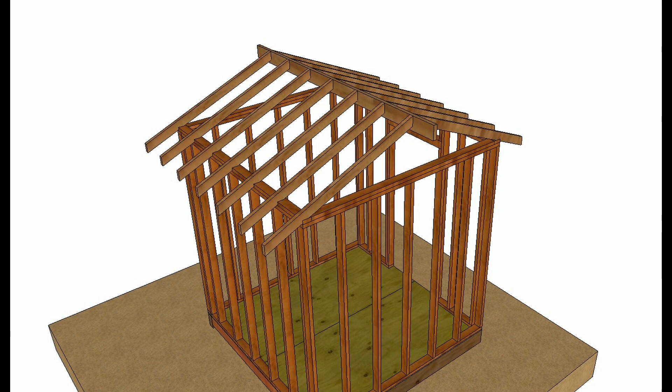In this video, I'm going to try and provide you with a basic and simplified explanation of cathedral or vaulted ceilings and why you can't simply remove ceiling joists or rafter ties and put drywall on the bottom of the rafters if you don't have the right

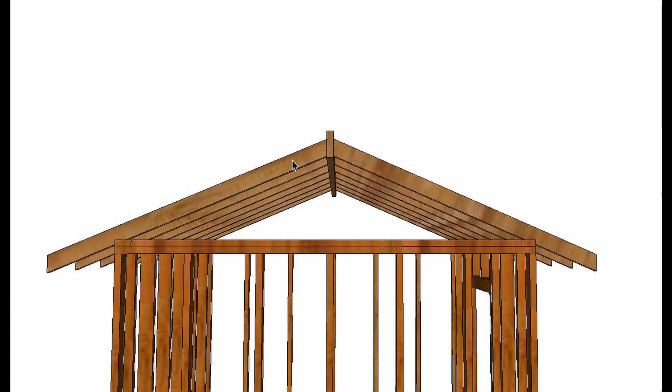type of framing. Now, in a regular, conventional roof system like this, the weight in a downward motion is going to be applied to the rafters and the ridge and can actually force the walls out. It can bow these walls out and create a dip in the center of the ridge. And the reason for that is because there isn't anything tying it together.

With the ceiling joists and the rafter ties, you're creating a connection from one side of the wall to the other side of the wall. So as the weight is placed, just the basic weight of the roof by itself, I'm not talking about adding snow or debris onto the top of the roof, the weight that would be transferred in this part right here is going to want to force the wall out. It's going to want to push it out and let this sag down.

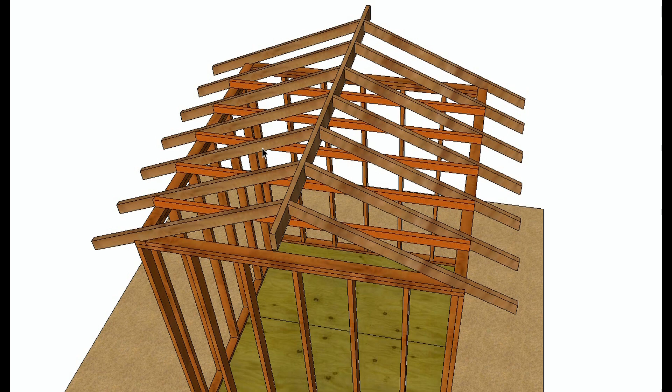Now, with this setup right here, I'm not about to suggest that you're not going to get a sag in the roof. If you have rafter ties or ceiling joists and the center of your ridge or parts of your roof are sagging, that would probably have more to do with the engineering of the materials. Maybe they're not the right size. Let's say you have a 2x6 rafter that's sagging. It might have needed to be a 2x8. So this right here is the typical way to frame a roof, a conventionally framed roof with a flat ceiling.

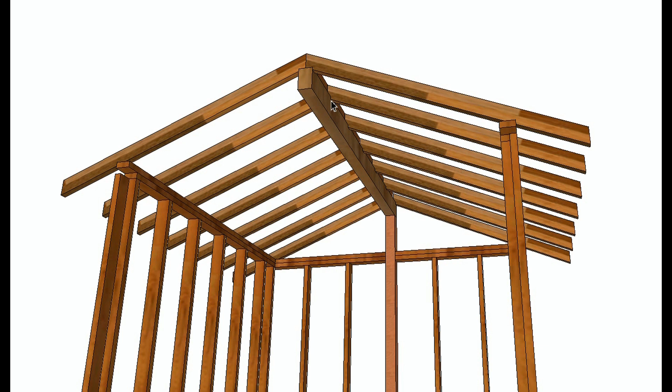Now let's take a look at another common way that you would frame a cathedral or vaulted ceiling without ceiling joists or rafter ties. This way right here is going to require a ridge beam. And I'm going to show you two methods. This method right here, and the next method will be where I raise the ridge up. In this particular method, the rafters are going to lap and connect to each other. In the other one, they will connect to the ridge.

So in this one right here, let's take a look at how the load would be distributed. The load from the roof is going to sit on the beam, and then it is going to come down the supporting post on the side here. Now, with this system, any load on the roof is going to be transferred between the wall and the supporting beam on both sides. So you're not going to have the walls spreading out on something like this.

And I'm not suggesting you can't have the walls spread out. I've actually seen it on longer walls. But the rafters themselves will actually help to prevent the walls from spreading out, because this is where the tie is. The rafters will form a nice bracing system and keep the walls from spreading out, because the load that is transferred onto the rafters isn't going to be moving the rafters down,

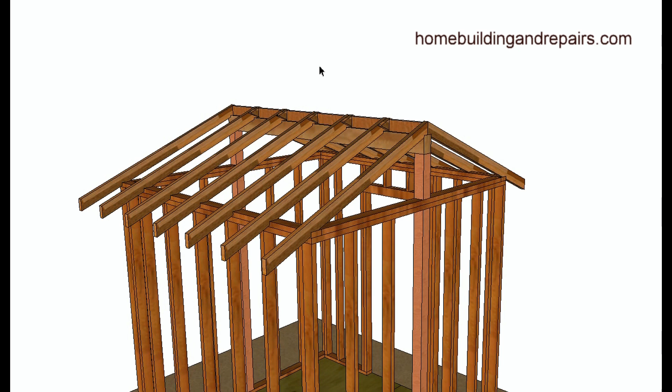creating a sagging ridge, which of course would force the walls out. That's actually supporting the walls. So the ridge beam is actually supporting it. With no movement down here, you're not going to get the walls to spread out. And I hope that makes sense.

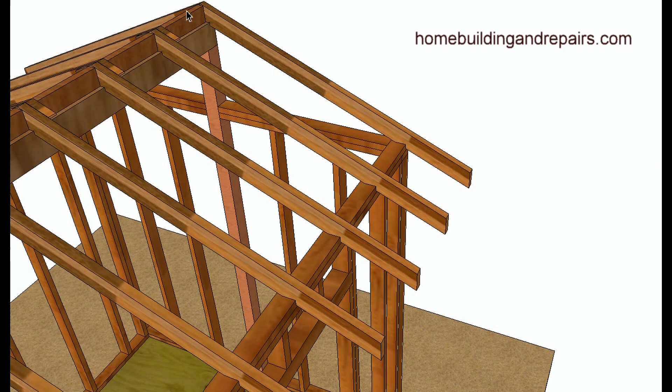Let's take a look at how we would connect the rafters here. This is actually lapping the rafters. You would nail into the rafters, maybe put 3 nails on each side, something like that, and then you would install some ridge blocks. And of course you would have seat cuts at the bottom for the rafters. Let's take a look at finishing the ridge off. Sorry about that. You'd basically just have two rafters that would line up at the end of the ridge.

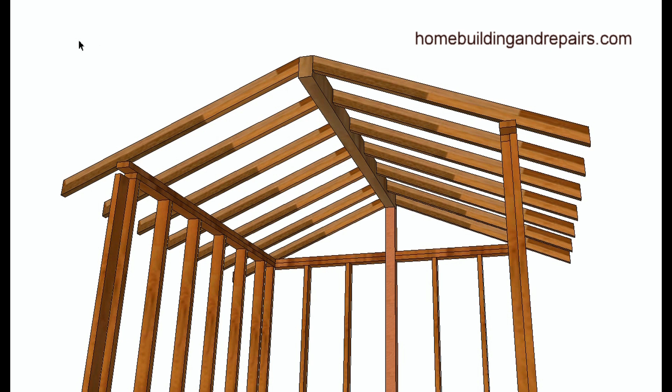Here's the other method I was referring to. We would have the rafters attaching to the ridge, and then of course the posts and the beams. Now I wanted to point out here I have a post that's sitting on top of a wall. We have a supporting post under the wall. Over here the post goes all the way up. I would imagine both methods would be fine, but because this method right here creates a structural break, that would need a strap.

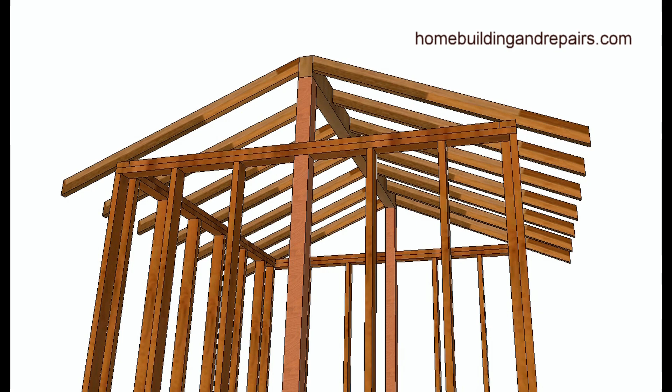You would need to put a strap on the wall on the other side. And this one right here, you're just transferring the weight down, but you could actually create a hinge point here. A lot of engineers don't like to see it. They'd rather see the strap on the wall with a full-length post than something like this, but I'll leave that up to you. Remember, this is the basics. I don't want to get carried away here, even though I just did.

What the heck? So, roof rafters that attach to the ridge beam instead of going over it. Something like this will give you more area if you're looking for a taller ceiling. And sometimes you can use larger rafters if you want the ceiling to be flat. You don't want to be able to see the ridge beam.

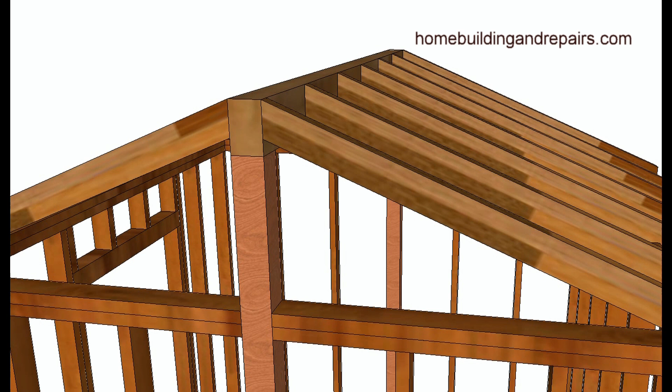Don't forget, too, that the rafter sizes will depend upon the insulation you're going to be using or your local community requires. So a lot of times we used to use R30, which was, I believe, 9.5 inches or 10 inches, and we could put the R30 in the 9.5 inch wide roof rafters. We couldn't use them with 2x8s, and every once in a while I'd come to a job where they would have 2x8s on a remodel, and it would create problems for the insulation. So keep that in mind when you're designing your roof system also. So this is just the basic seat cut, give you an idea.

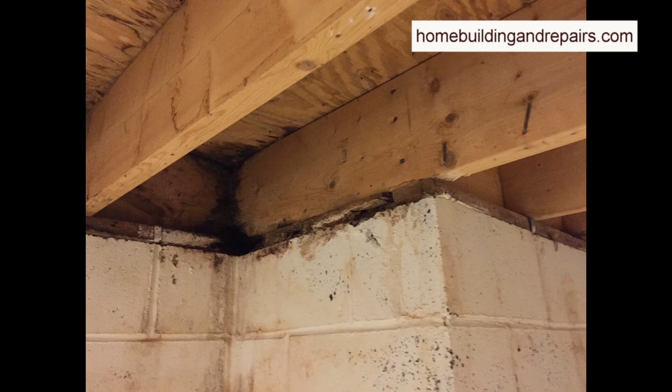In this video, I am going to try and explain where water can actually come from, where it can actually enter into a building. I know a lot of times we see water damage in a certain spot, and we think that the water is coming in right from the other side. That's not always going to be the case.

Now, with a concrete block wall, I want to point out that concrete blocks can absorb moisture. If the moisture is absorbing in through the waterproofing on the exterior, then it can actually be absorbed into the wood. The wood will actually pull the moisture out. So you might come to a spot where you have more damage to a bottom plate than you would to the framing, and that actually might be something to consider when you're trying to figure out where this water is coming from.

Another thing I'd like to point out is that water can travel horizontally from right to left or from left to right, front to center, center to front. It can travel underneath the plywood. So the water can actually be coming in here and then going over here. And this creates a lot of problems for trying to figure out where these problems are coming from.

Here we can see that water has come all the way over to here. It looks like this whole area here has been wet, goes all the way over to here. You could be thinking that the water is leaking from directly above, and that's not going to be the case. It could be coming from another point. So again, this is where it gets confusing. Just because you see a lot of damage in one spot, this does not necessarily mean that this is where most of the water is coming in from. Could be coming in from another area.

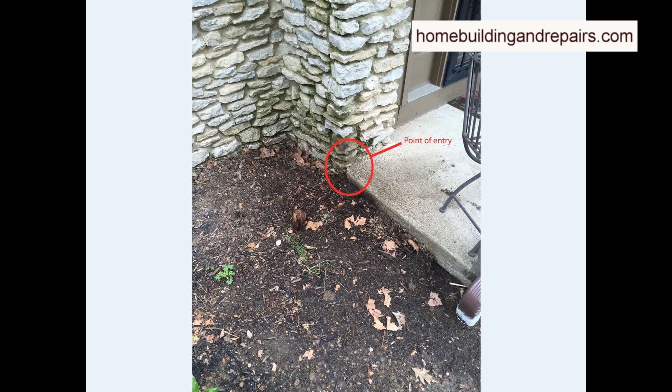Here's another view of it. The bricks or the rock here, the stone, could actually be discoloring or changing color because of the moisture. We can see that this looks a little more moist than this area over here, but it's hard to tell. Looking at this, I guess this is all moist here. So the damage here could be coming from the interior water leak, or it could be pulled out of and absorbed from the soil into the block and being pulled up. I've seen this stuff pull up as high as 3 feet.

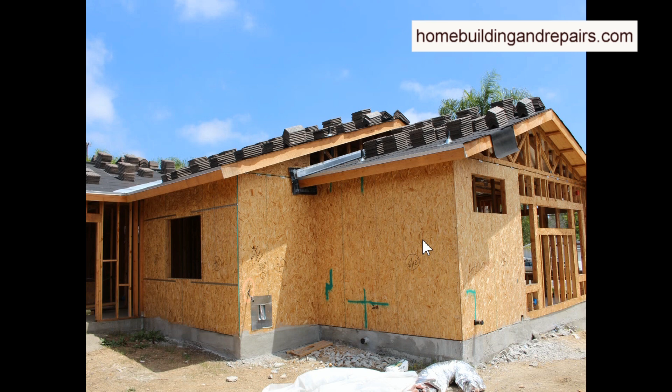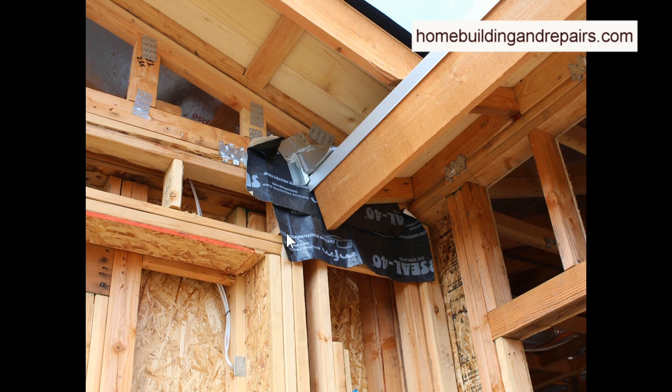Do not be misled. Let's go ahead and take a look at what it would look like before it was framed, before it was wrapped with the building paper and finished. A lot of times these problems right here, this is a big problem area. This is actually why most builders use this type of a system. They will come in and put some type of a high-grade sealing, a building paper. It might be this product.

I hate to use the names, but we used to buy a product called Bituthene, and I really don't know what you would call this. I guess you could read it right there. Building products, who knows? But this is good. This is a peel and stick. And you can see they didn't peel anything off because they don't want it to stick to anything yet. They're going to come in later and run the building paper underneath this so that anything that runs off of this will run onto the building paper.

So here's another question that was sent to me. The individual has water damage in a basement, and it's right above a porch that has concrete on it. And this is basically what the framing would look like. Here we have some soil, the basement walls, the floor framing, and a little bit of the wall framing.

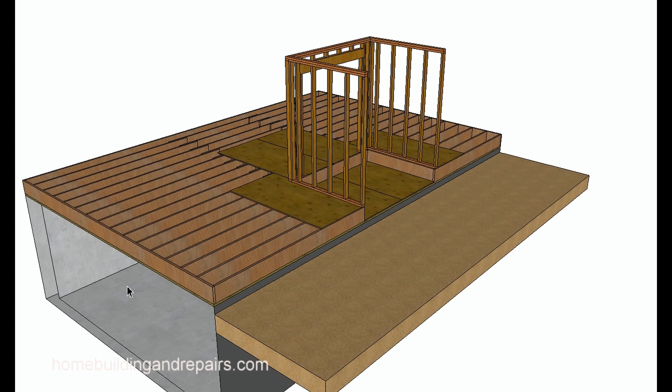And I went ahead and removed the section of the basement wall here to give you a better view. Now, the damage that they seem to have in the pictures that they sent me seems to be along the beams and a little bit of the floor joists. And this wouldn't be uncommon. It would be more common to have damage around the edges of the porch, where you're going to get a little more water than you would through the center most of the time.

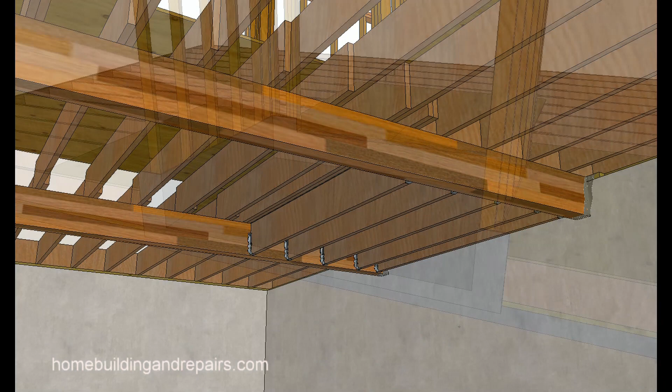And don't forget, with water damage, you can actually have water damage right here. It can be right above these joists, let's say, and it travels farther. It can travel and make a bigger mess here, and this is where you think the water damage is, and it's actually back farther. So if the home is level, the floor is level, the water can travel quite some distance. I've actually seen it travel on roofs probably about 15 feet away from where the leak actually was. You could end up with the same problem here. Don't forget that.

Let's go back up on top and take a look at what the waterproofing should look like, and, of course, the set of stairs and the porch. I wanted to just give you an idea of what the stairs look like to give you a visual of where the problem could be. Now, the problem is more than likely, like I said, the water's going to be coming in through the sides, and it could actually be coming in from behind the building paper that would be applied over the waterproofing for the siding or the stucco.

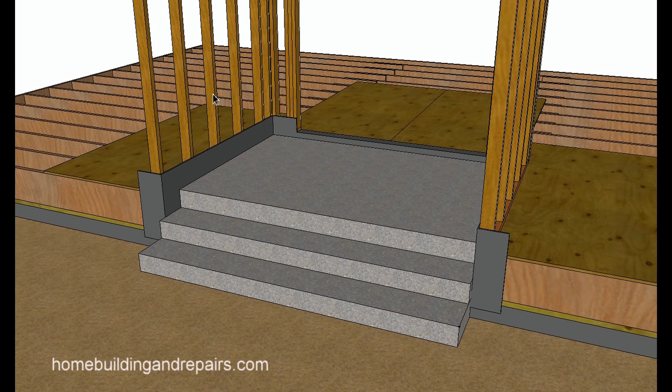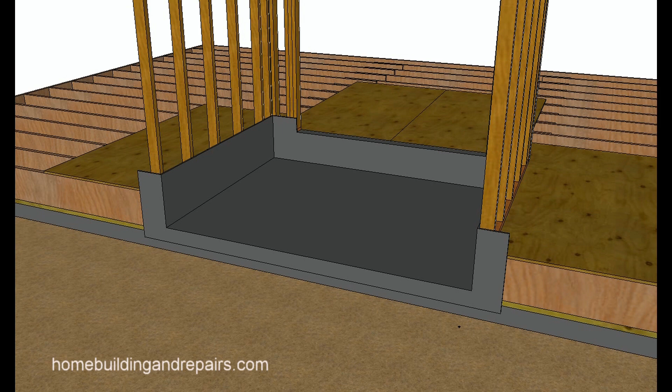So with that said, let's take a look back at the waterproofing. The most common place for it to be damaged will be at the edges, because wood expands and contracts, buildings settle. There's a variety of different things that can cause these materials to fail. Of course, one of them would be poor installation, inferior materials, and its worst enemy, of course, will be time.

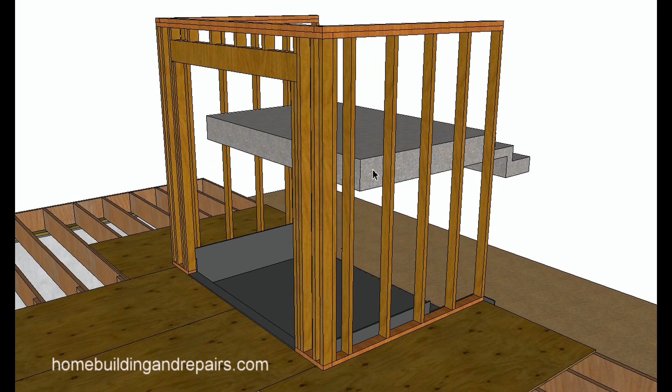In the last section of the video, I went ahead and raised the concrete stairway to give you an idea of what it would look like, kind of a snap in place. If you just removed this and lowered it down, it would snap into place. This is what it would look like. And just kind of going around the back here. Another view underneath to give you an idea. This is what it would look like. And there's the waterproofing again.

So here's the bad news. If you do have water leaking from a porch area like this, something that is framed like this, there's a really good chance that it's the waterproofing. Now remember, I'm just making this as a suggestion. You would actually need to verify it somehow by doing a little more homework or contacting a professional in your area, a contractor or something like that.

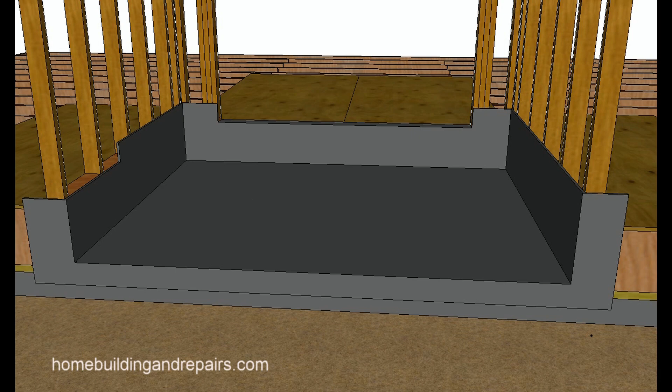The damage most of the time is going to be from the waterproofing, as I mentioned earlier. The bad news is that the stairs are going to need to be removed and the waterproofing redone. This is probably going to be the biggest reason for water damage if you actually have a framed system over a basement or a floor or a garage that looks something like this.

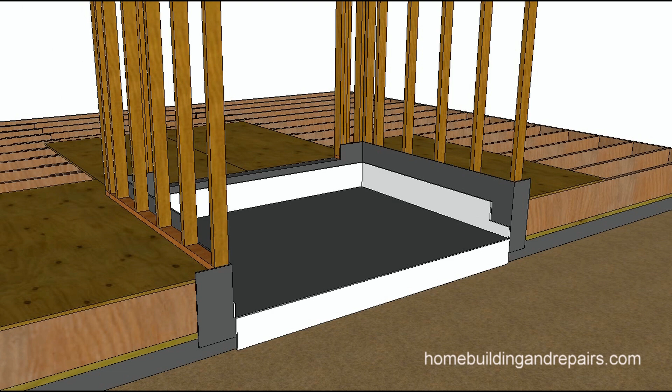All of my videos are based on my observations or the observations of others that make sense. They are not based off of fantasy, so I'm not about to speculate and get all dramatic here on how much of a problem something like this could create. So I would imagine if you had something between a 1/4 inch and a 1/2 inch of foam or some type of a concrete expansion material, you would be fine. And then, of course, you could pour the concrete porch or stairs, whatever you would be pouring or installing.

Now, after you have the concrete installed, and I've seen people actually do this before the concrete was installed, but to me, why not? Pour the porch, get it in there, and then have them install the siding. But I've actually seen people go in and install the Z-bar, or the L-metal, I should say. They install the L-metal, and then someone comes in and finishes the concrete stairs.

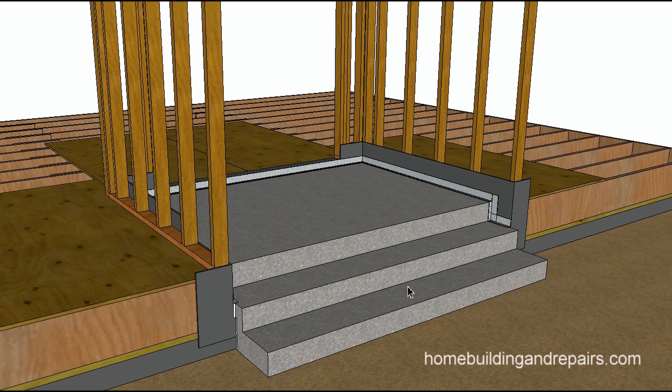That's not something I would recommend doing. If you had to, I understand you're in a situation where you have to do it. That's fine. But to me, it would be waterproof, pour the concrete, and then do this part as I'm showing you. Now, this would be L-metal, and I'm going to try and make another video to show you how you actually install the L-metal, how it laps properly.

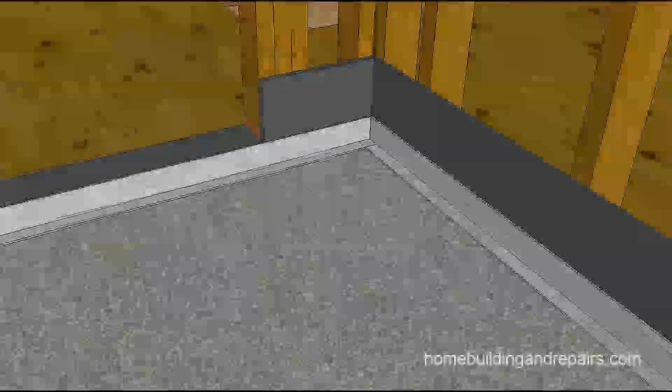So we would simply put the metal in so that any water that gets behind the siding can actually go out instead of down behind the waterproofing here. So the metal here, even though it's on top of the waterproofing, any water that gets behind the metal is still going to go down the waterproofing and out. It's not going to be a really big deal as long as the waterproofing holds. So let's go ahead and take a little tour of the metal and the waterproofing, give you an idea of how it's going to look.

Now, one thing I'd like to point out is that you are going to need to install some type of a sealant underneath the metal here. I've seen people just put a bead of sealant on the front, and that's fine if you want to do something like that. What I would recommend would be, before you put the piece of metal down, simply put a bead of caulking down and then squish the metal into the caulking.

And do not smear it. If the caulking squishes out, install the metal, let the caulking dry, and then cut it off with a knife. If you try to smear it here, this could turn into a mess and really look horrible. So just a thought there. And if you need more help on that, I can always provide you with another video on how to install the caulking. Next up, you would need to install the building paper, and it's going to go over the metal.

So what we have here is the waterproofing, the metal, and then the paper. The paper is going to provide us with a protective layer for any water or moisture that gets behind the siding. It's going to get behind the siding, come down, and roll off. As long as this area is sealed underneath the metal, it's going to roll onto the concrete. And in some cases, it's going to absorb into the concrete.

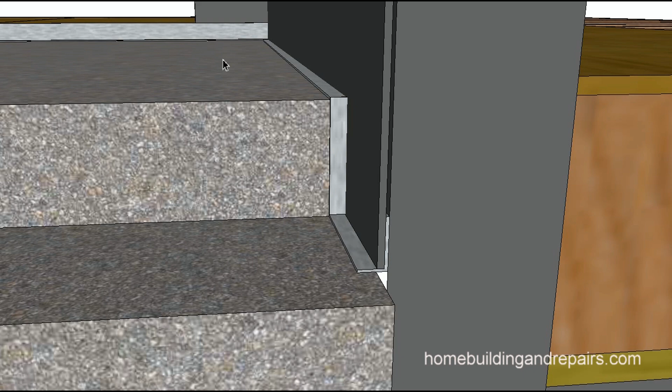But again, we can't solve every single problem. And if you want to put a sealer on your concrete for something like this, I think it would be a mistake, because any water that does get trapped below isn't going to be able to get out. So not something I would recommend, and I hope that makes sense.

So here's the siding, and this siding could be plywood, could be lap siding, tongue and groove, shiplap, whatever. It could be anything. This principle can be used with a variety of different types of siding. So another thing I would recommend, leave at least 1/4 of an inch gap between the siding and the metal flashing.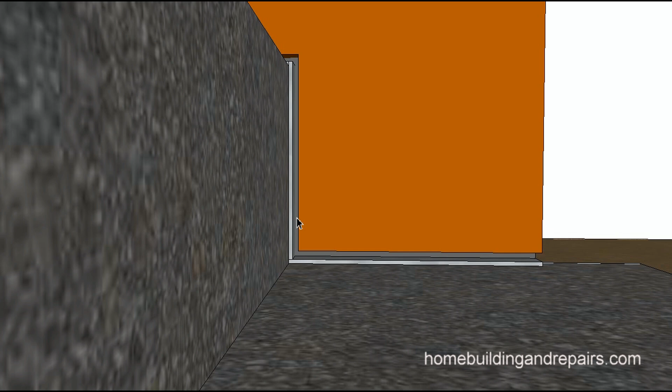Water will pool up in these areas. And now you're probably thinking, well, what about dirt and debris that gets caught in there? Clean it out. You've got to clean this stuff out. Now, one of the biggest problems with something like this, and I swear it just irritates the heck out of me, but it happens all the time.

I cannot believe how many times I've built something and a painter comes along, and this happens. It might not be during the original construction, but later on, a painter will come in and they'll caulk this area, and that is a no-no. The minute that you caulk the area, the minute that you seal this area, any water that gets behind the siding is going to get trapped, and it will end up rotting the siding out because it has no place to go.

We've got to keep these areas open so the moisture can get out from behind the siding and not get trapped in it. And I started to see that problem with elastomeric paint. People paint something like the siding with elastomeric paint, and then they seal any gaps, and then the water has absolutely no place to go. It can't even evaporate out through the face of the siding.

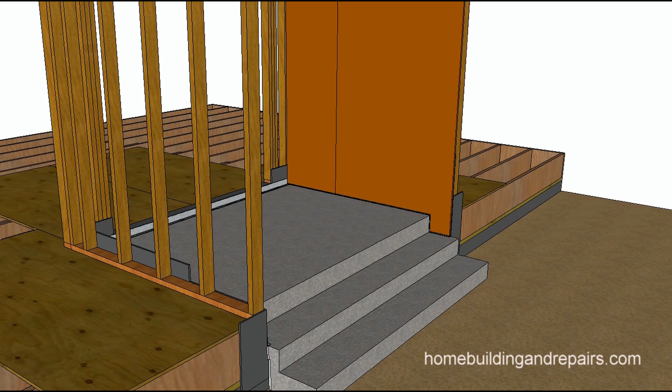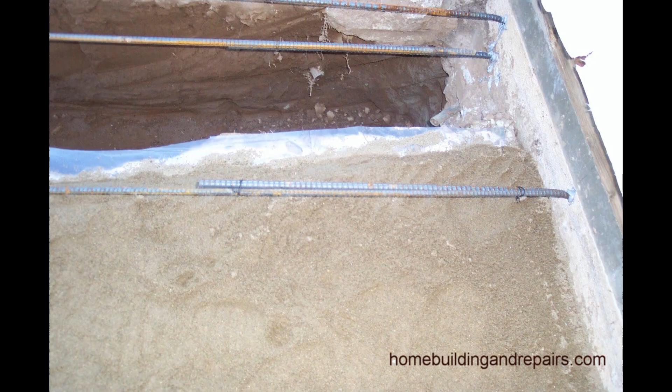Let's take a look at a few more pictures. Here they are connected, going all the way across. We have a house here and a detached garage. We went ahead and built a room addition in here. And here's the dowel, a piece of rebar, 1/2 inch, I would imagine.

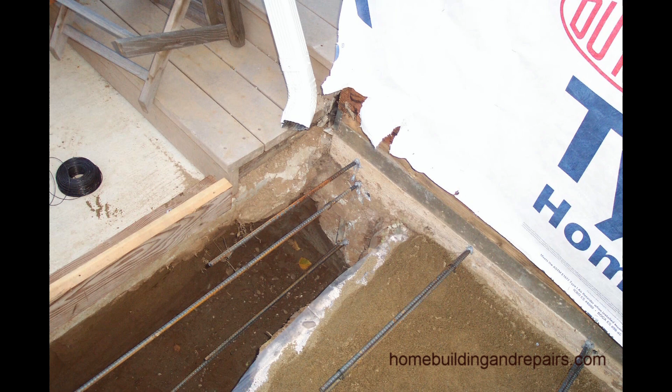You drill a hole into the concrete, put some epoxy in, slide one of these babies in, and you have a dowel, a ready connection for something that's going to give you some structural strength for a concrete slab, mainly like a room addition. This wouldn't be something you would see in new construction, hopefully. Here it is again. Here's what it would look like finished. Here we have the dowels going across.

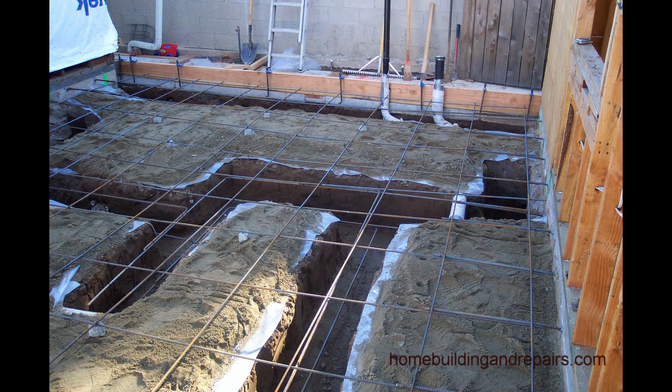Now, what I'd like to talk about is a different way to do it. Here is the way that I had in the pictures we just looked at. We had a dowel going into the concrete, a piece of rebar tied to it, and a piece of rebar going into the other foundation. So we had a continuous piece of rebar here and 2 separate dowels.

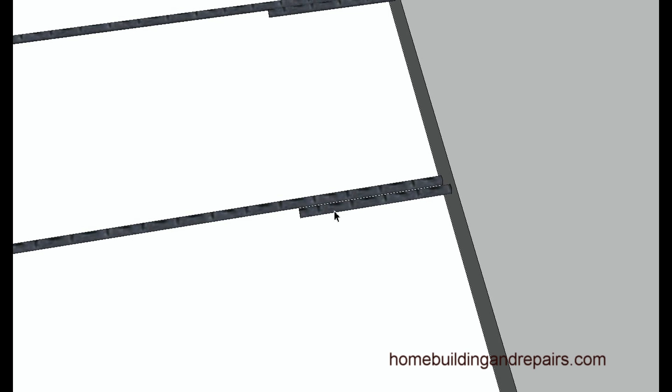Now, this right here would provide us with a better method, I would imagine, a better connection. This would be taking a full length piece of rebar and doweling it into the concrete slab and then attaching it to a dowel that is installed into the other concrete slab. It would basically eliminate one of these connections. Now, this is a great idea, and I've actually done it before, but I've had some problems.

First thing I'd like to point out is that when you install a small dowel, you usually have a lot more control over it. You knock it in, you have the dowel in, and it usually isn't going to move. And remember, this stuff cannot move. So if you use a long piece of rebar for something like this, it wouldn't be a bad idea to put some 2x4s or something underneath these areas, something to lay the rebar on while the epoxy is setting. You will need to set the rebar in place, and it cannot move.

The problem I ran into when I did this once was that I would put the rebar in, and it sagged down. I didn't have boards supporting it, and I kicked a couple of them a few times. If you could just imagine you're trying to walk over this stuff while you're epoxying the rest of the rebar in, and it would move. So that's not a good thing. So be careful if you are going to use this method right here.

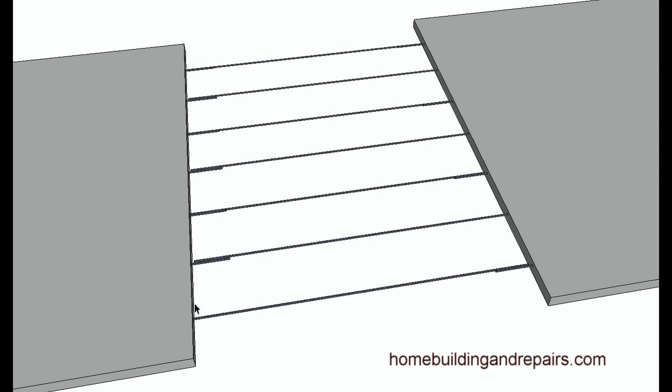And it is actually a method I would use again, now that I know what not to do, kind of a thing. Now, here's what the individual who got me thinking about this suggested, and I love this idea. He suggested alternating the rebar, and this is a great.

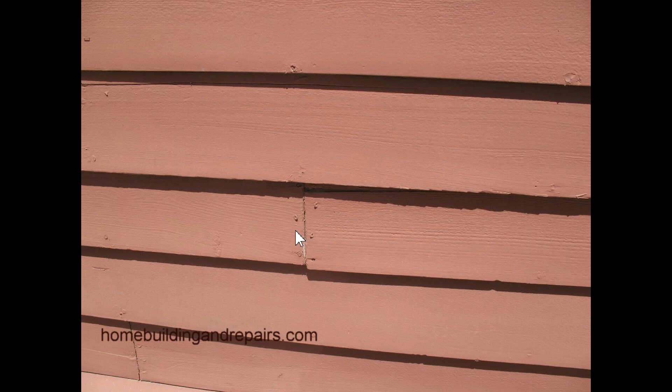The joints, you could always fill those. Now remember, this is wood we're looking at, and you can see that it doesn't look like it's ever been filled. Wood is going to expand and contract a little more than some of the other products, like fiber cement. I don't even know if fiber cement siding expands and contracts. I think it does, because I remember putting caulking in the joints, but whether or not it moves as much, I would think that wood, masonite, products like that, plywood, they're going to move a little more than something made out of cement, especially with fiberglass.

Do not caulk any horizontal joints if you have something like this where you have some Z-bar. This is actually made so that any water that gets behind the siding is going to come out of the front here, and I believe I have some more videos on that explaining that process.

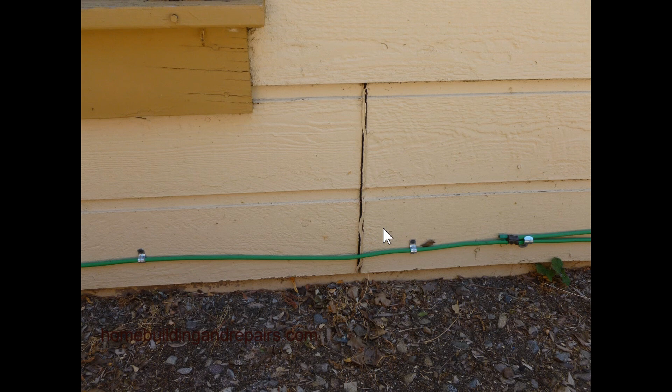So now here's a good example of someone caulking the butt joint, where the siding was going to butt up against the other joint. And you can see here where the caulking has separated. And this could happen. If this is the case, pull the caulking out and refill it, or just put some more caulking in, depending upon what it looks like. And I'll leave that up to you. But this is actually something you could end up with.

So I would recommend contacting the manufacturer of the product for more information. They are the people who make these products, and they have more information than I could ever possibly provide you with. So that's about it for this video.

Do this at your own risk. If it sounds like it'll work, you don't want to have bugs, and maybe you're getting a little too much air in something like this and it's bothering you, then why not fill it and let the siding expand and contract, and then put some more paint on it, fill the little cracks and gaps with some more caulking, and eventually I would imagine that you won't have to do it anymore.

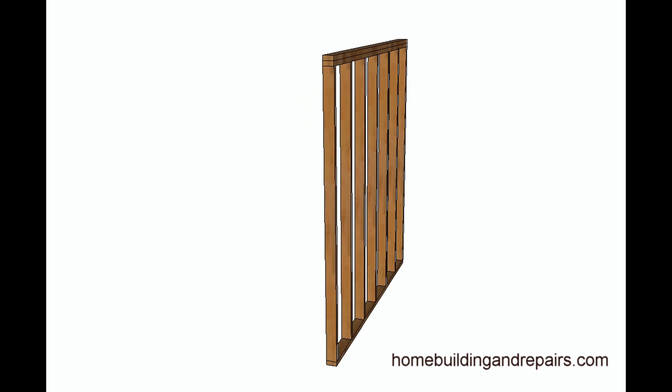What we are looking at here is a perfectly straight wall with no imperfections at all. If we sight down it, put a level on it, straight edge, it is going to be perfectly flat in both horizontal and vertical directions.

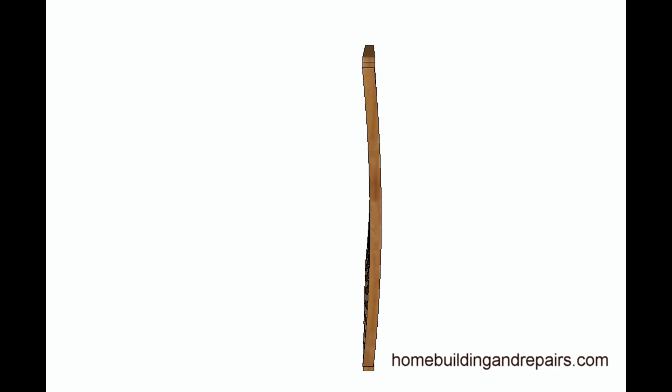Now here's a wall that isn't very straight. It's got some nice bowed studs in it. But for illustration purposes, I went ahead and did this. Obviously, you wouldn't use a wall stud like this, but I wanted to make sure you could see what the wall was going to look like. Now, if you were to put a straight edge on a wall like this, it's going to be straight in this direction. If you went vertically, it's not going to be straight.

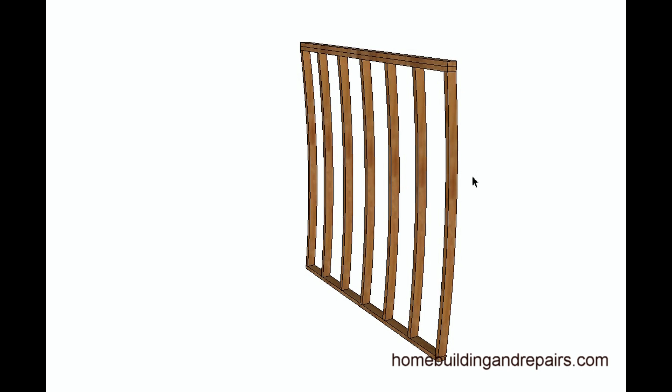Now, the reason why I provided you with this example here was just to give you an idea of what the bowed studs look like. And this is what it would look like if all of the bowed studs were going in the same direction. All of the bows in the stud were facing outward in the same direction. Now, here's the secret to the reason why I made the video. And that was to point out the problems you're going to have if you don't crown all of your studs in the same direction.

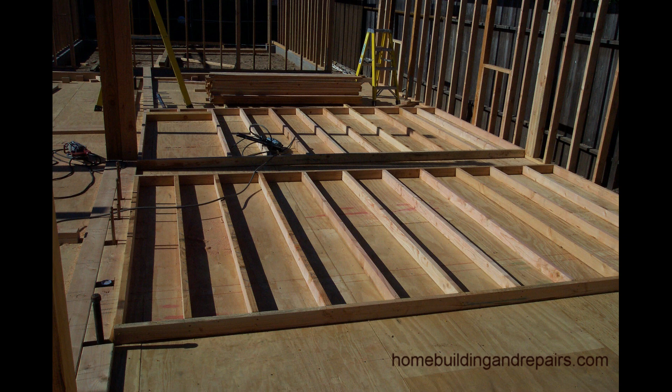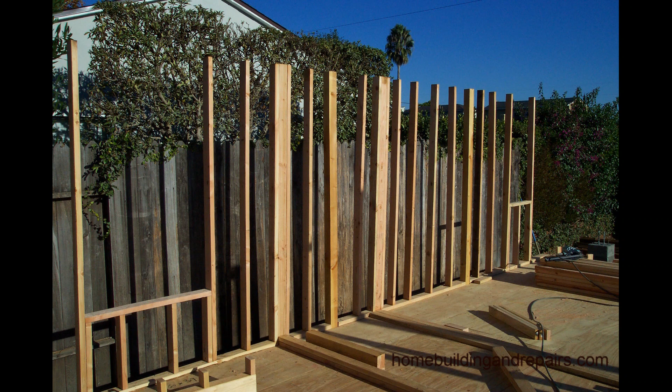If you were going to frame a wall on the ground and then stand it up, you would simply need to sight all of the wall studs, look down the length of the stud, and see where the bow or the crown was. And obviously, if there was no bow, if the stud was nice and straight, you just simply place it. You could place it in either direction, and then if you have one that's got a slight crown or a slight bow on it, then put it face down or face up, and then run all of them in that direction.

If you are stick framing, where you have the bottom plate attached to the building and you're going to put each stud in individually, then simply sight each stud, look at it, and put the crown in the same direction this way. So if you're going to frame either way, on the ground or stick framing like this, then you just need to make sure that the studs are going the same direction. Trust me, this is a lifesaver for when you go to straighten all of the walls at the end, and it really does make a big difference.

I did it on a room addition I was taking my time with. Obviously, if you're in a hurry and you're the framer and you're not going to be doing the wall straightening, you don't care. But if you're the builder and you're going to be paying for all of this, then it might make a big difference. And the room addition I did really made a big difference, and the walls really turned out great.

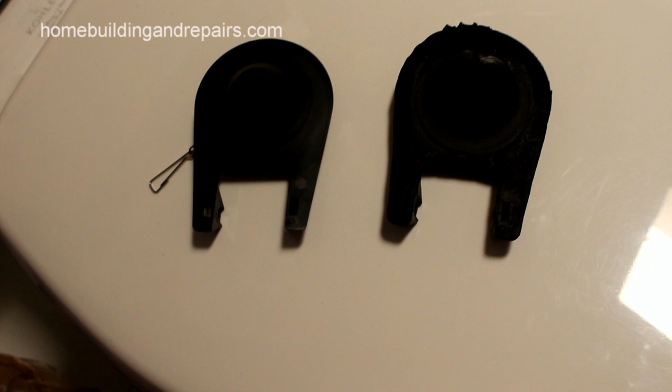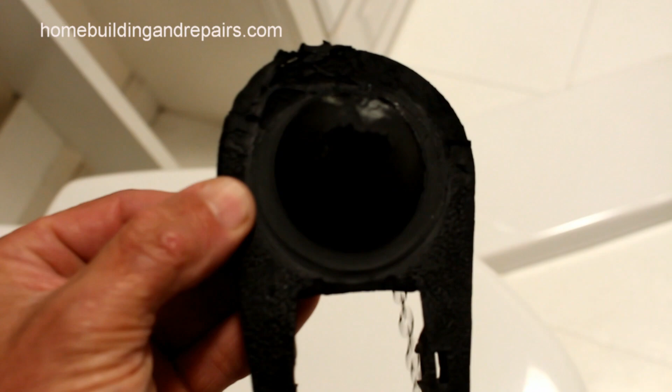Okay, what we're looking at here is two toilet flappers. One is new here. Turn it over. The other is the one that we are replacing, and hopefully you can see the damage there on it. Turn it over. See if I can get some different light here in case you can't see it. You can see where it's all rough there, and of course this allows the water to run through it.

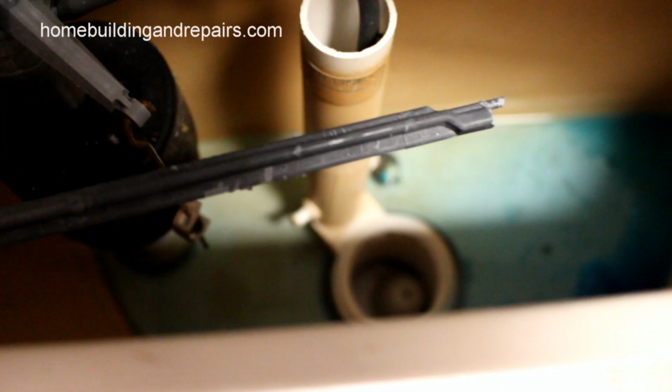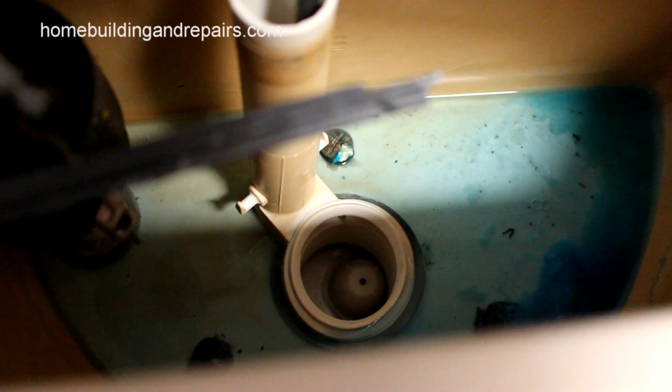So if you have a leaking toilet, there's where the toilet flapper goes. If you have a toilet that just keeps running, you need to check the toilet flapper because it's probably not getting a nice tight seal down there, and I'm having a hard time pointing to it. But that is where the rubber part of the flapper seals. It would install this way, go down, and create a nice tight seal. This one here, obviously, you can see where it's all damaged, so it is leaking.

Here's something you need to consider before actually doing it, and that would be cutting into a public sidewalk. There are some walkways that might be private. You would need to actually verify this with the city. Another thing is not to cut into the curb or drill holes into it. It's real common to drill a hole into a curb so that you could put some site drainage in. Extremely common.

Now, cutting a sidewalk, this is something that if this is a public sidewalk and it's owned by the city, and now don't be confused. There are builders who will build the sidewalk. They will build the curb. They will install the street. And then at the end of the project, they give it to the city. This is common. This is so that the builder doesn't need to maintain it.

This wouldn't be a problem if this was a private walkway and the property owner maintained it. Totally different thing, which you would need to actually validate by checking with your local building authorities. This would be the city planning department or the city building department for clarification.

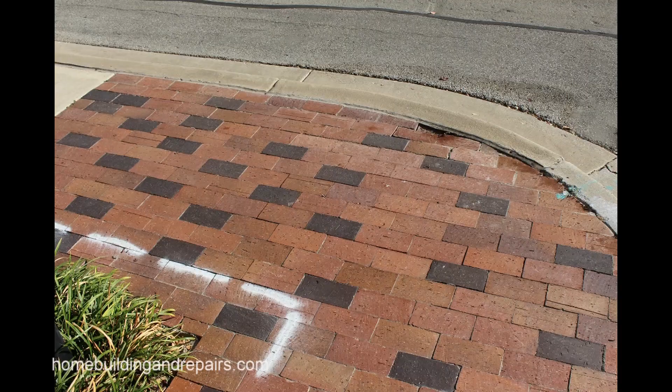Now, here's one of the problems that you're going to encounter, and this is what the city doesn't want. If they went ahead and poured a nice concrete walkway around here, and the concrete's perfectly fine, and you cut it and install these brick pavers, and then they're sticking up a little bit, there's gaps in between, or you start to have problems with erosion and the bricks start to sink. This creates a safety hazard that you might not have encountered with concrete. And that might be the reason why the city doesn't want you to do that.

So if you would like to install something in your sidewalk, even if you want to cut the sidewalk because you're going to install something and then repair it, this is still something you would need to check with your local building authorities. Now, obviously, if this is something you don't want to deal with, you can do it over the weekend, fine, knock yourself out. But if the city ever finds out about it, you could have some problems. What would they do? I don't know. If you fixed it and it looked good, I don't really see where that would be a problem, but I'm also not the city.

We were actually going to do some work on the street in front of our house, and they said that if we wanted to do the work, they would charge us for the permit. I was like, really? All we're going to do is fill some asphalt in the front so that it looks better. We got a couple of divots in there. And they said, no, you can't do that without a permit. So that was just filling some small potholes that the city hadn't got to and still hasn't got to.

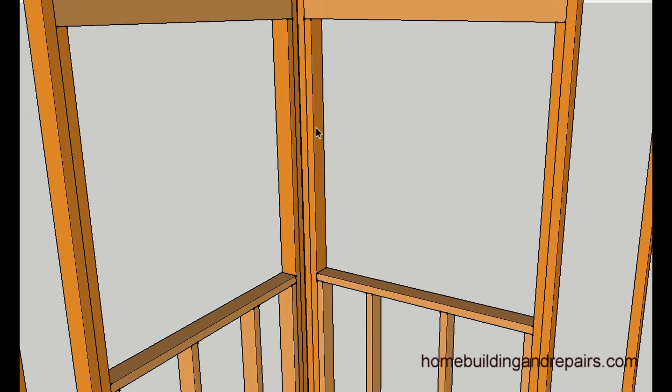Here we can see how the bottom is laid out. Again, two studs away. The most common reason for using this type of construction method would be if you had window trim. So for example, if you were going to use wood windows and then put a 2-inch piece of trim around the window, to give it a picture frame look, then you would need to use something like this. You can't stick the windows all the way in the corner. You're going to need some room. And this method right here would be great for that. And you might even need to move it 1.5 inches further, depending upon the thickness of the window trim.

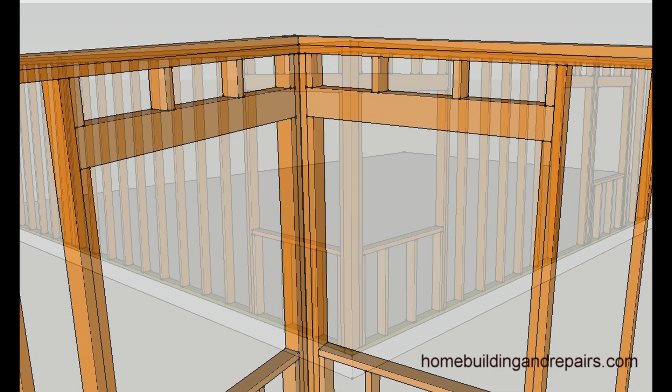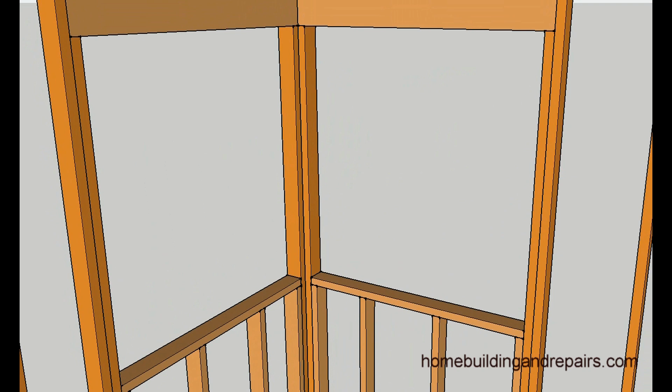In this method here, we are using a 4x4 in the corner and a full-length trimmer on each side. This would keep us 1.5 inches away from the corner. And again, this method could be used if you were going to use a certain type of wood trim, a little smaller wood trim. It would work fine for something like a vinyl window or aluminum window.

I say aluminum windows, I don't even know if they make them anymore. This is 2016, and who knows? I don't know when the last time was I saw an aluminum window.

This would be a window with a flange and maybe a 1-inch to 2-inch, even a 3-inch, depending upon the thickness of the window and the thickness of your wall framing. It would be something that would not need to be trimmed out with wood.

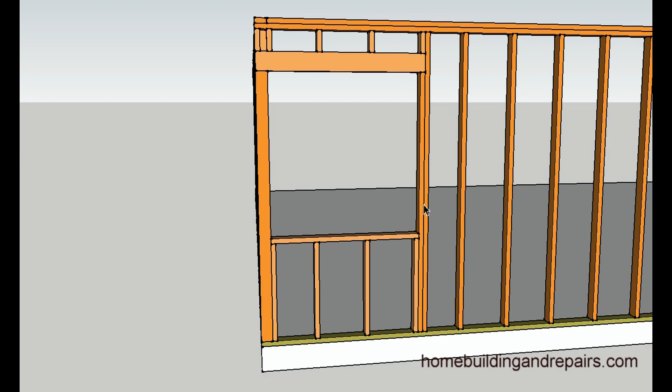Here's a 4x4 in the corner, and this is probably the most common method used for framing corner windows. You would have no trimmer in the corner to support the headers, because the headers would be sitting on top of the 4x4. They are mitered with a 45-degree angle. I'll show you a little bit more of that in a few minutes. 4x4 supporting the window header, a 2x4 full-length trimmer supporting the header on this side. Here's how the bottom section would be framed so that you have plenty of backing for drywall.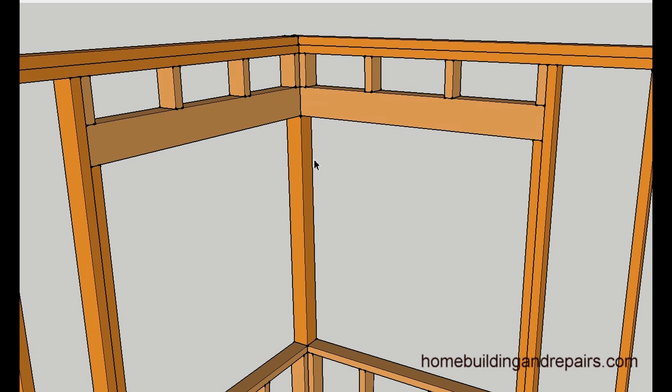Upper inside corner, again sitting on the 4x4, everything dies into the corner. Here you would have a nice line coming out here, and then of course you would drywall this or trim it out with wood, however you were going to finish it. Another view here just to show you where it's supporting the 4x4. The 4x4 post is supporting the headers.

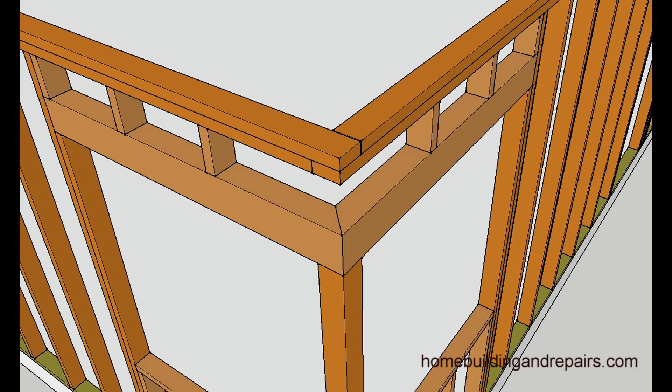Last but not least, take a look at what the mitered header would look like. You would have a header, a 4x6, 4x8 window header, and you would miter the corner with a 45-degree angle, depending upon what corner you're using. A standard corner of a home is 90 degrees. You could use this same method for another corner type of window, but you would just need to change the angle of the header if the wall was not intersecting at a 90-degree angle. Hope that makes sense.

Here's the last example I could come up with. If you have another example or another idea, feel free to email them to me, and I will see if I can attach a link to them at the end of the video or make another video. Now this one actually uses hangers. These are inverted hangers that will attach to the 4x4.

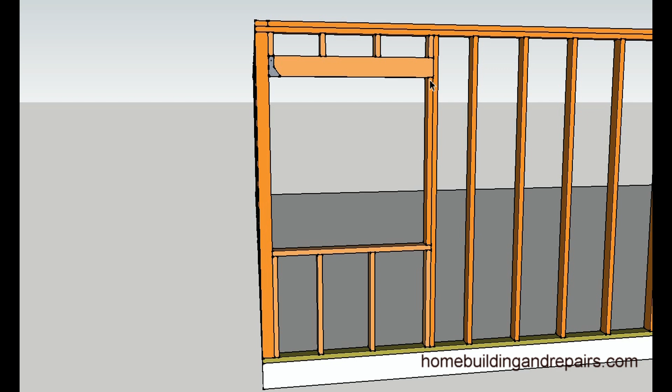Now something else I'd like to point out here is in this example we are using a floating trimmer where the trimmer stops at the subsill and doesn't go all the way to the ground. I just wanted to give you an idea of the different trimmers that you could use. So here you can see we have the trimmer sitting on top of the subsill, and here it is going all the way down to the ground. 2 hangers in the corner.

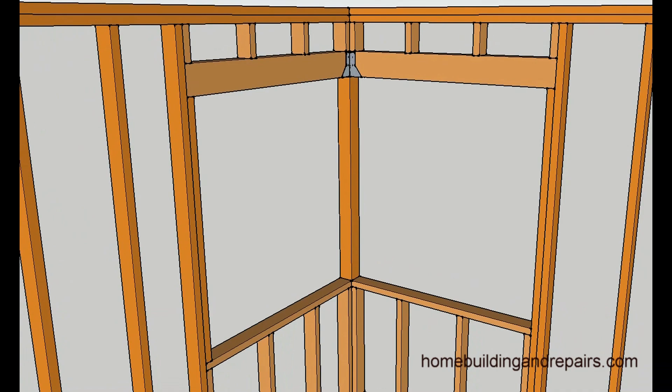I just wanted to pan back here and give you another idea with the trimmers, how they're supporting the header. Header supported by a full-length trimmer, a header that is supported by a floating trimmer. What's the difference? A lot of people I worked with like to use the floating trimmer so that they could move the bottom just in case they had to. And that's a good enough reason for me right there. I like this method here.

If you are building homes nice and plumb and level, and everything's nice and square, this method right here would provide you with a little more support. But as you can also see, it's going to require another cripple. Here you can see that we only have 2. Over here we have 3. So it's going to require a little more wood to do it this way also.

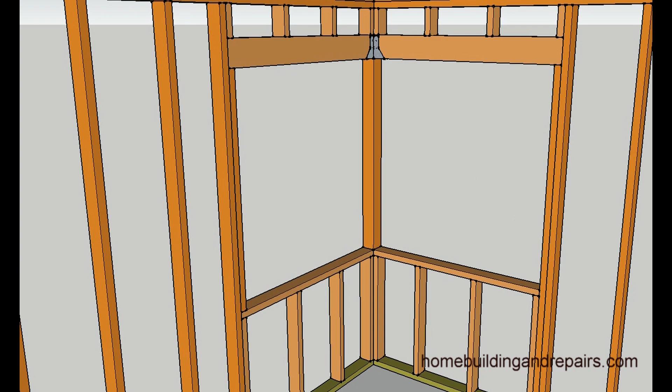Take a look at the hangers. Hangers attached to the post. Nail in there, and this is an inverted hanger. You can usually find it as a Simpson HU. Again, that's an inverted hanger. The flanges are not on the outside, they are on the inside.

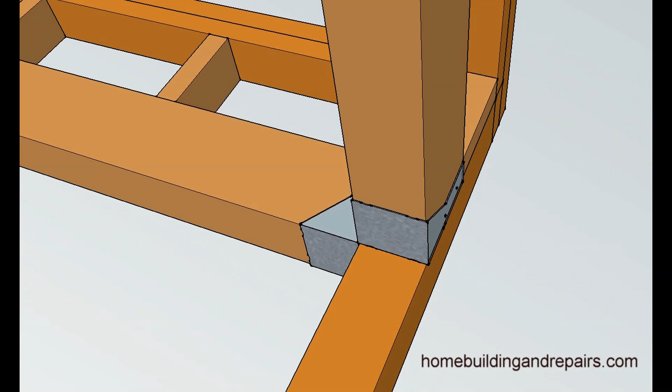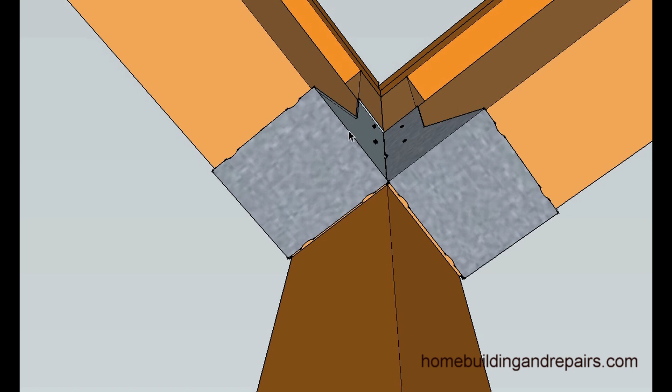Now here's one of the reasons why I don't like using this method, and sometimes I've had to deal with it. Structural engineers put it in there, but the hangers usually create problems for the drywaller and whoever's going to be putting the exterior finish on, because they're usually a little bit bigger. Here you can see it's kind of sticking out. Let's just say it's a 1/16 of an inch. That probably wouldn't be too bad, but it's going to create a little bump in the drywall, and this usually isn't a good thing.

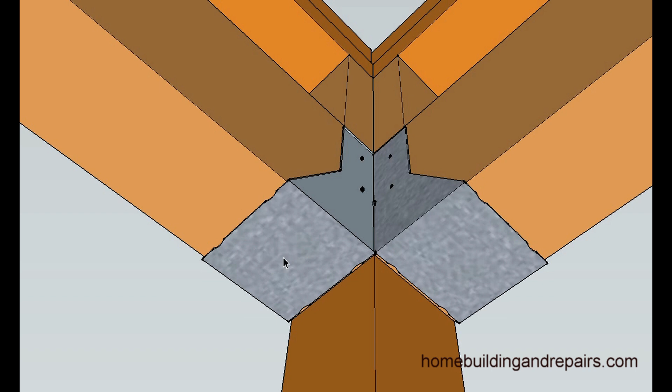So let's just see if I can go out here. Another problem it's going to have is for nailing the drywall in these corners. You could imagine when you put the drywall here, this will be the furthest you're going to be able to put a screw or a nail, and the same thing here. I'm going to see if I can pan around to the outside. This wouldn't be as big of a problem on the outside because you're going to be nailing over here.

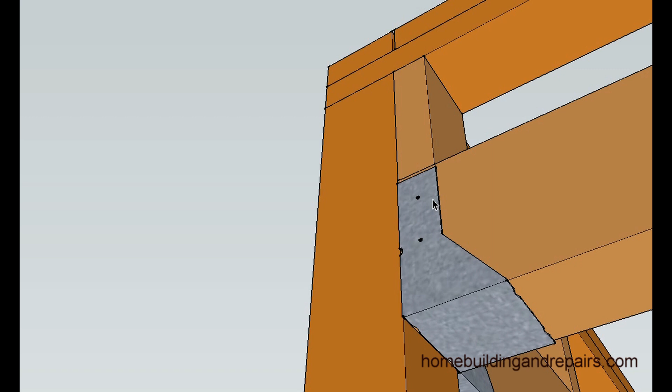But again, the reason why I don't like using these is because they usually create a bump or a dip. And if you don't nail the hanger on correctly, then you could actually have problems. It could be sticking out even further. And of course, I've nailed these things on before where I couldn't get the beam or the header in because I had nailed them too close together. So not a big fan of this method. I would go with the method before this one where you use the mitered headers.